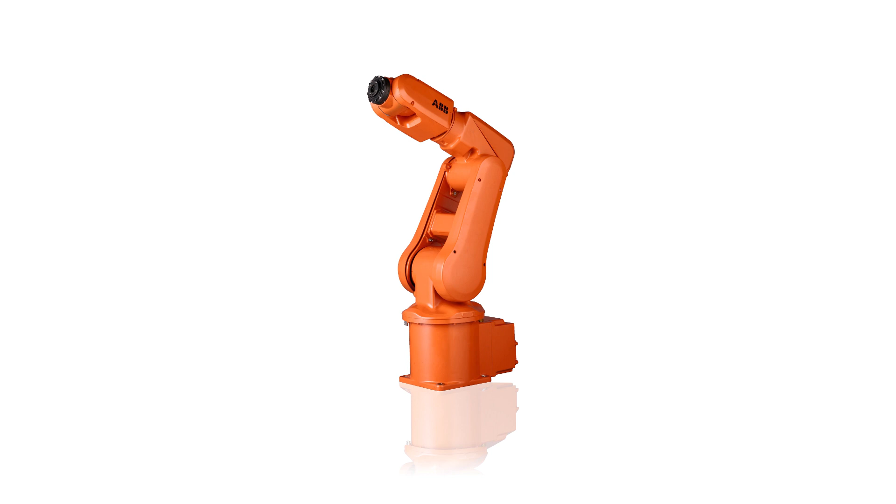The ABB IRB 120 is ABB's smallest ever industrial robot manipulator, and it comes in two variants, the 120 and the 120T.

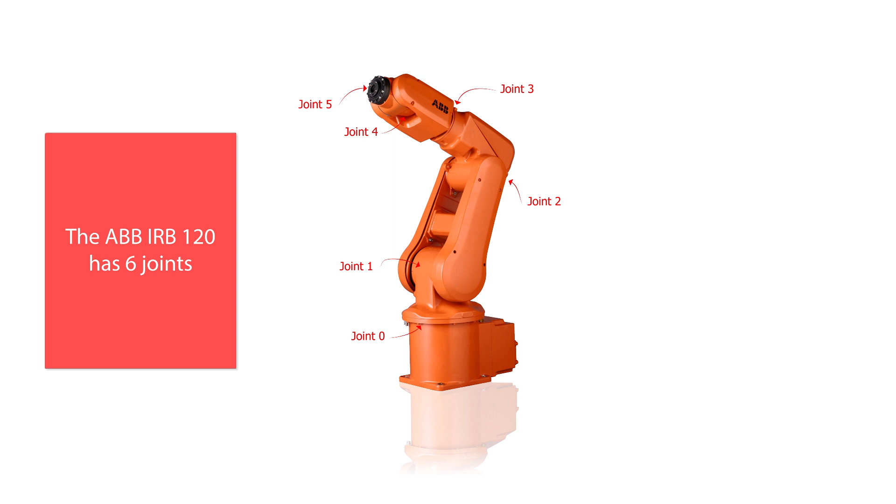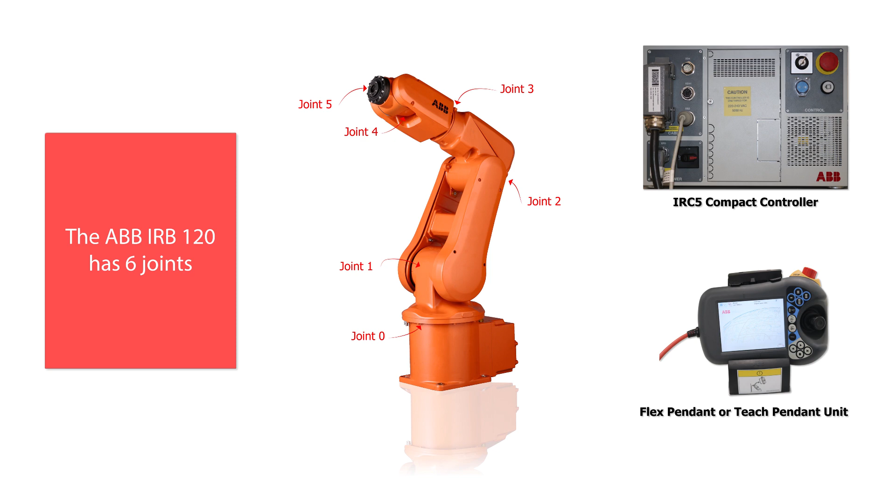The ABB IRB 120 has 6 joints, and they are controlled by the IRC5 compact robot controller using the handheld Teach Pendant or ABB's Robot Studio environment.

As the series progresses, I will introduce you to the IRC5 compact controller, the robot's handheld Teach Pendant, and its programming IDE and programming language, Robot Studio and Rapid respectively.

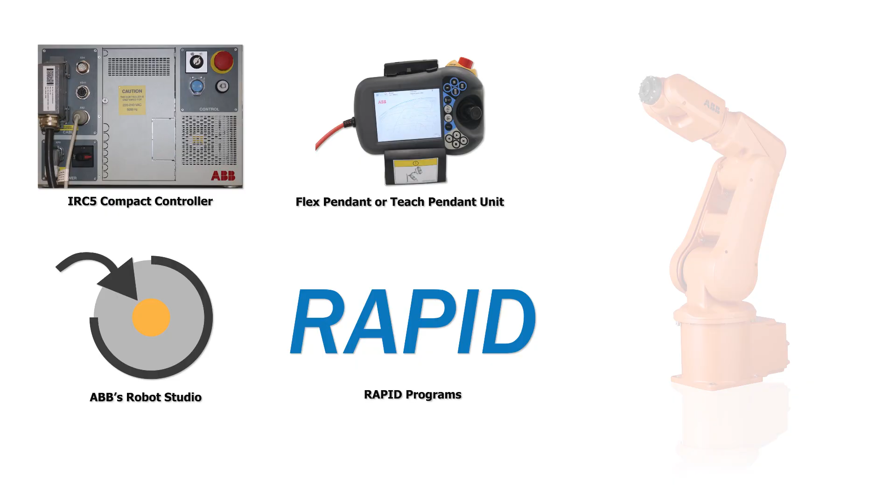The IRC5 is a compact robot controller for the ABB IRB 120. It provides power to the robot and also connects to your computer or the Teach Pendant.

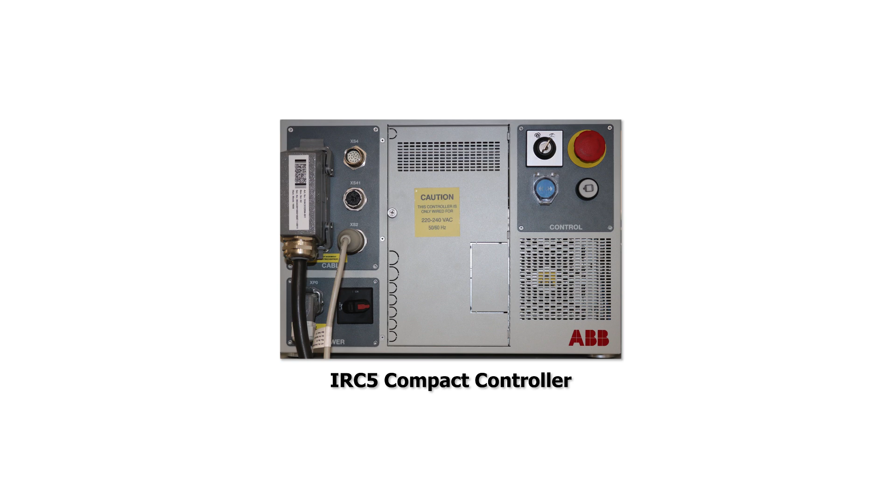There are a few interesting buttons on this controller that you should know about. Firstly, the power switch. You can turn the power switch to switch the robot either on or off.

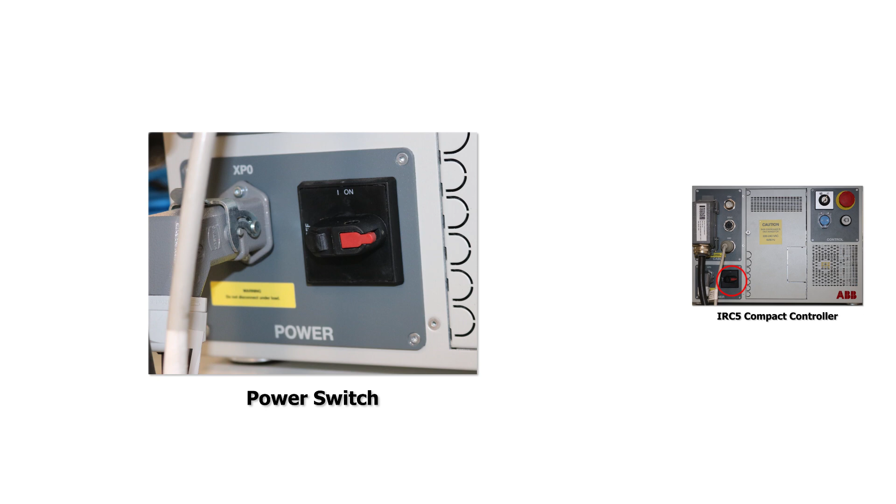At the top right hand side of the robot controller, there are 4 buttons which set the run mode of the robot, engage and disengage the brakes for the motors in the robot's joints, and an emergency button which shuts the power to the robot's joints.

Unless instructed, please ensure that the run mode is set to the teach mode. This is the icon to the extreme right showing a person's hand.

A Teach Pendant is a handheld device used to program industrial robot manipulators. The ABB IRB 120's Teach Pendant is equipped with several buttons and a joystick used to control the robot's movements to and from points within a given workspace.

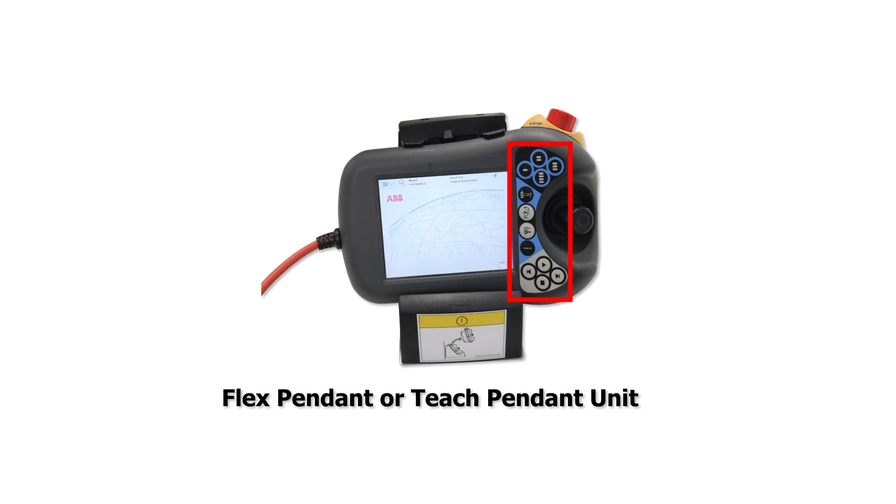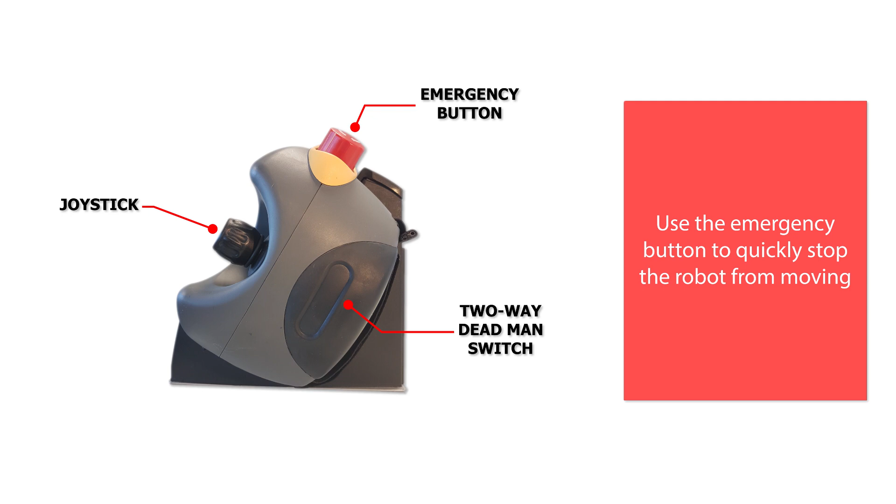For now, there are 3 main buttons you should be aware of. Firstly, the emergency button. This button should be used in the event of an emergency to quickly stop the robot's motion. Secondly, the two-way deadman switch.

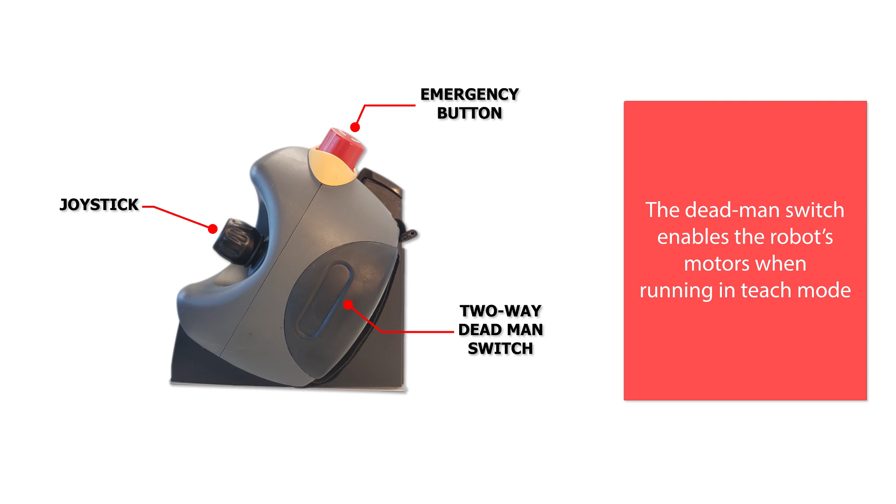This switch ensures that the robot's operator is fully aware of the robot's motion. When active, the switch enables the robot's motors. Please ensure that this switch is not pressed completely, and this only works when the robot is set to run in teach mode. Lastly, you should know that the joystick is used to move the robot around its workspace.